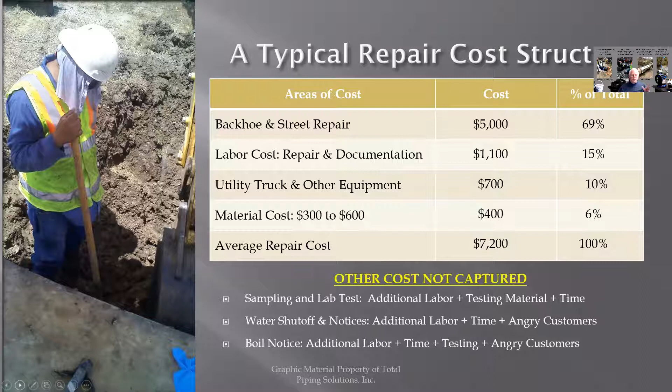There are other components of every job involved, and that could be sampling, downtime, angry customers, boil notices. You name it. There's a lot of things involved with making a repair, and we want to make it safe—safe for the worker doing the repair, and safe for the public at the same time.

So when we look at how to make line repairs, typically 2 to 12 inch, that's most of the pipe in the ground, there's 3 ways to make a repair. We can clamp around the pipe—that's probably the most prevalent type of repair used. We can do a cut-in repair where we cut it out, bring in 2 couplings or 2 MJ sleeves, and a piece of new pipe. That takes a little bit more time.

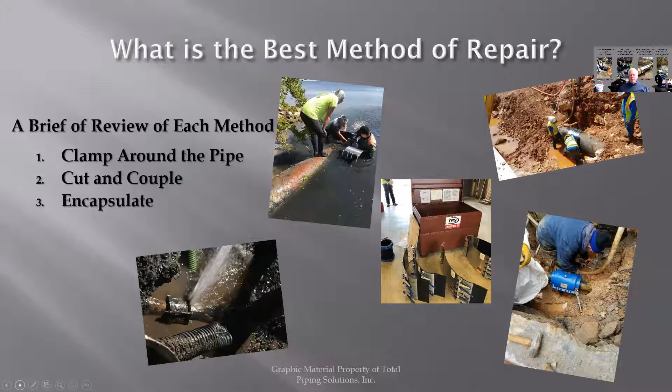And then we can encapsulate the leak. It could be a leaking joint, it could be a leaking coupling or old repair clamp. Any number of things can leak on the line.

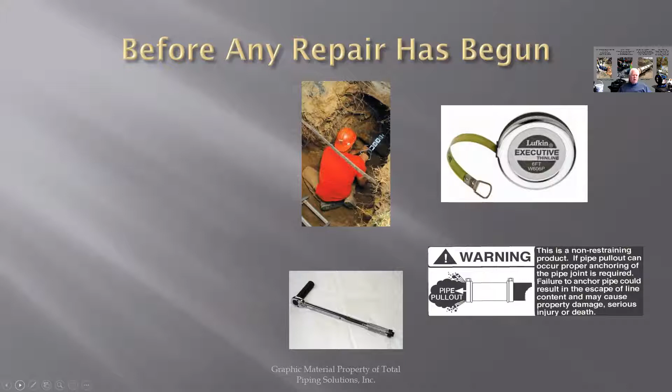So before we start any repairs, what we want to look at are some of the things essential to making a successful repair. We always clean the pipe, and every manufacturer says clean, descale, wash it down with some water. Make sure you have a good sealing surface for whatever you're putting on the pipe.

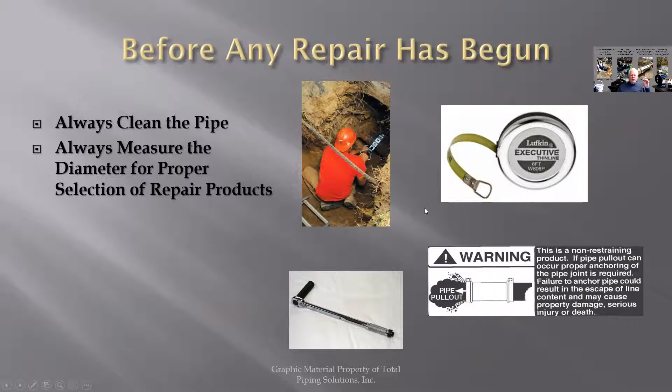Secondly, always measure the pipe diameter. I'm going to go back and forth between these slides and a little hands-on here. At this point we've got an OD tape here—we supply those if anybody needs them. It's essential to know how to use an OD tape, believe it or not.

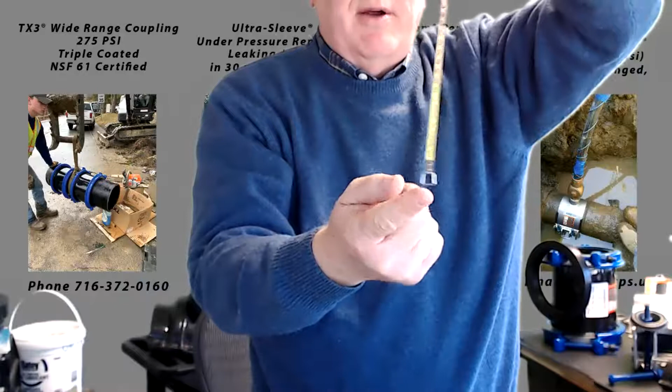When we're using an OD tape, I had a guy not too long ago—you see the little pull tab here? He pulled it around and read to the end of the pull tab. Well, that pull tab is about 1/4 of an inch long, and that ended up being a full inch difference in diameter on the pipe. He had the wrong repair product out on the job site because he didn't know how to use the OD tape. When you're using an OD tape, always measure to the beginning of the scale, not the pull tab.

That's some basic training stuff that people need to know and be aware of, and I think it's essential to what we do with our jobs on a daily basis. So know how to use your tools and your products that you're using to make the repair.

Always read product labeling—there's tons of good information on product labeling. Is it restrained? Is it non-restrained? Is it good for water, sewer, natural gas? What is the line content the product is compatible with? And last and foremost is the torque on the product.

Why do we want to talk about torque? Torque protects the pipe. Too much torque can crush the pipe. Over-torque can crush the product or deform it. A proper torque sets the gasket at the optimum setting for performance of the product at a working pressure that's satisfactory for the product itself.

So one of the things I look at is nuts, bolts, and washers. A perfect example—I won't say who in upstate New York did this—they called us and said the bolt's bent, the lug's bent on the repair clamp. What we found out was that they failed to read the directions on the product. They were using an impact driver that had 3 settings on it, A, B, and C. Setting A was 75 foot-pounds, setting B was 150, and setting C was 250 foot-pounds of torque.

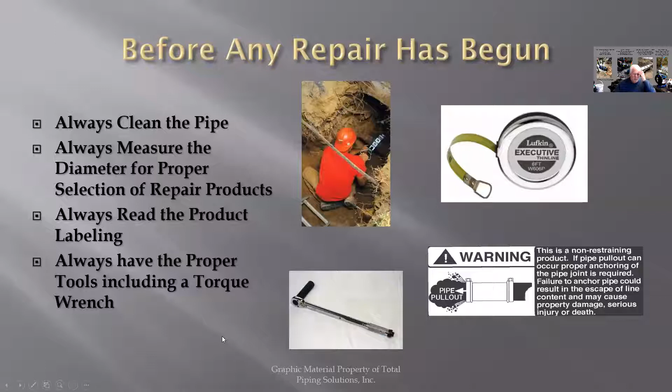So every material has got a yield point, and too much torque will actually interfere with the performance of the product. So when we look at that, let's make sure that we're using our tools properly.

So next thing we want to talk about is repairs with repair clamps, the proper way to do them. One of the things that we do is we're going to fix a lot of different kinds of things with a repair clamp. It's under a reduced pressure, always under reduced pressure.

Repair clamps are not designed or made to be installed under full working pressure. No product is. All seals work better under reduced pressure. And when I say pressure reduction on a repair clamp, what is that? Take it down to 10 or 15 pounds.

Can't find a valve that works, and I've been on several jobs like that where we have an old system. We've got valves that haven't been exercised or used in years, and you can't shut the water off. So what do you do? Open a couple hydrants, drop the pressure down, bleed everything down, get it to an acceptable point where the flow is dropped, the pressure is dropped, and then the seal will work in a pretty good fashion.

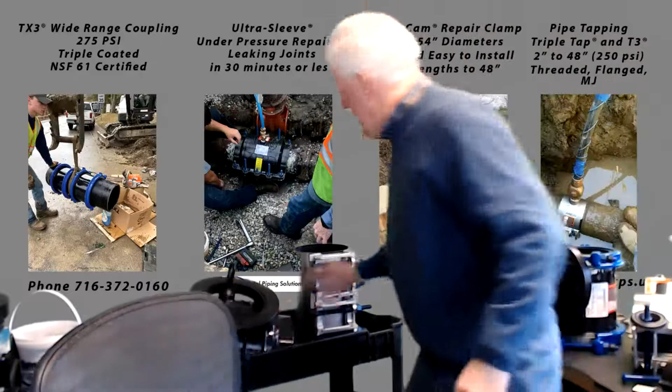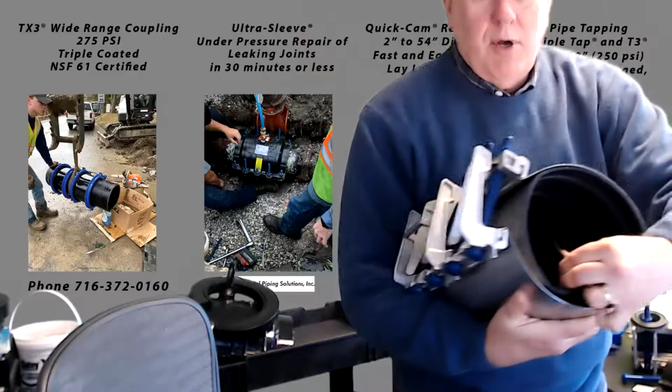So one of the reasons I'm talking about seal is if you look at a repair clamp, this is our Quick-Cam repair clamp, real easy to use, high performance product. Every gasket on every repair clamp, whether it's our repair clamp or otherwise, we've got to show this, has got a tapered end on it. And that end, that tapered end can actually bend over and pinch off.

And actually operating pressure will cause that to bend over and pinch off. So what happens if it bends over and pinches off? We have a problem. We have a leak path built into the gasket when that happens. So you want to make sure that everything stays in line, that won't happen. The pressure won't push that taper over for a bend. That's got to be laid over and rotated and smoothed out on the pipe.

So to get a successful seal on any kind of a repair clamp, whether it's a Quick-Cam made by Total Piping Solutions or whether it's brand X, Y, or Z, make sure you always reduce the pressure.

Other thing you want to do is lubricate the gasket on a repair clamp too. Lubrication allows all the little indentations and imperfections, the peening on the ductile pipe, everything to smoothly settle in and the gasket to seek the lowest point in a quick fashion. So lubrication is helpful in installing any clamp.

In lieu of lubrication on a repair clamp, you can always use soapy water. So I got a bucket of tub lube back here. We like that product, it's an OD lube. There's poly water, there's all different kinds of lubes. This lube that we use is a little thicker. It doesn't really wash out under pressure very easily, and it is water soluble and NSF 61 certified and approved. So good for use on any kind of pipe repair.

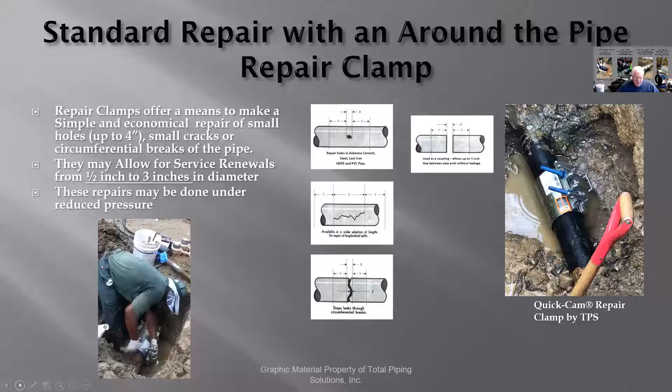Again, everything needs to be done under reduced pressure. When you think about making a repair on a leaking bell or some kind of leaking joint, would you ever use a repair clamp on that? No, never. Whether it's stainless, ductile lugs, or whatever, as soon as you step the gasket, you lose working pressure rating. As soon as you interrupt the gasket path or the way it lays on the pipe, you're going to lower the pressure rating. So it's not to be used for anything other than complete and total inline repairs.

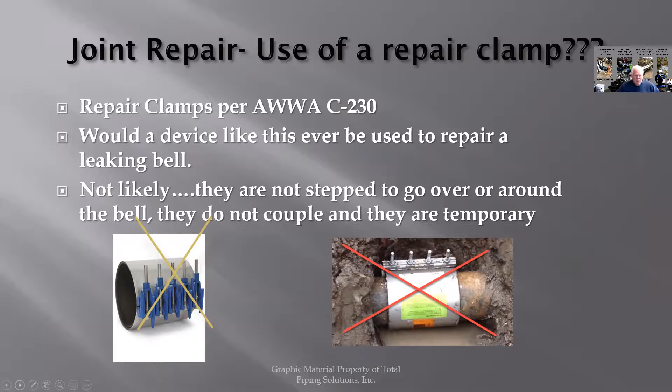When we look at the standard repair in the industry, other than repair clamps, I call this the go-to repair—the cut-in repair. Basically what we're all doing is leak detection. We find the leak point, then we have to determine how we're going to make that repair: repair clamp, cut-in repair, depending on the severity of the damage, or maybe encapsulation of that leak.

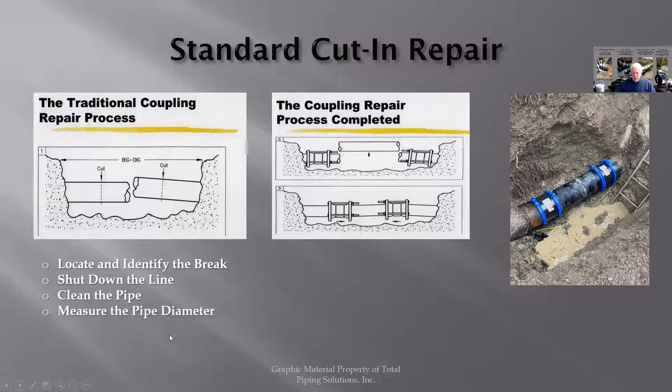So when we're looking at the traditional process of a cut-in repair: identify the leak point, shut the line down, cut it out, bring in 2 repair couplings or 2 MJ fittings and a new piece of pipe, and couple it all back together. Again, locate and identify the break, do a shutdown, pipe clean, measure the pipe after cleaning to get the proper OD, select the product, remove the damaged section, and then disinfect as part of the reassembly process and replace with new pipe and 2 couplings.

So it's a pretty big job—takes somewhere between 2.5 and 3 hours for a 6 to 8 inch repair. Again, everything needs to be tightened to the proper torque, and of course the bigger the diameter, the longer the time. So when you get up to a 12 or 16 inch, you might be into it for 3 or 4 hours on a repair like that. Those types of repairs are very common in the industry, but they do require a lot of time and labor.

We manufacture a coupling here—we'll just show it to you real quick. It's called the TX3. It's got 12 to 14 mils of epoxy, and it's a three-layer coating system. We've got a zinc prime coat underneath. We split the end ring—compression end, split end. That split allows us to easily assemble them here in Olean without a hydraulic press, pushing the gasket on. Nice handle, higher working pressure than anything else out there—it's rated at 275.

Gasketing is NBR and NSF 61 approved, for 61 and 372, which means don't worry about lead in the gasket compound. It's a nice layered gasket system with an inner layer and outer layer. The inner layer is good for IPS, ductile cast iron. The outer layer is good for AC pipe diameter. The inner layer, if you remove it, as you can see, just pops right back into the grooves.

You can put it back in. So we don't really need to worry too much about ruining the product because we pulled the gasket out at the wrong point. It's not a flip-out gasket, it's not a change-out gasket. Everything is integrated, it's all fully replaceable. So I think it makes it very convenient for use on cut-in type repairs.

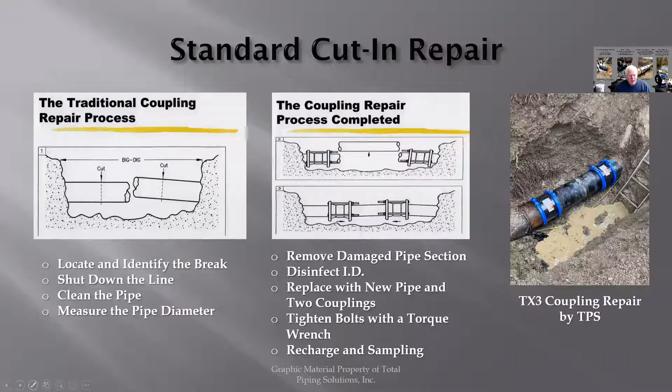So going back to those types of repairs, the next thing we want to look at is repairs on other things. And you probably think, well, we've already covered those things. Well, if we look at the number of repairs done on the most predominant pipe sizes, 4 through 12 inch, that represents 85% of the repairs in the marketplace.

What you don't realize, and again this is a number we've pulled out of AWWA working with different utilities around the country, 20 to 25% of leakage occurs on existing joints: old couplings, joints, push-on joints, rolled gaskets, AC pipe collars, universal cast iron pipe joints that are leaking. There's a lot of things that leak underground that just don't involve pipe breakage, rust, or corrosion.

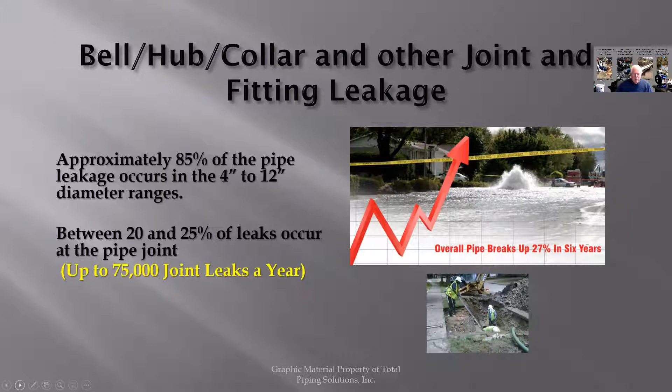That's a lot - that's 75,000 leaks a year on existing joints. So I think what we've got is something worthy of consideration for repair of these types of joints that you see in this slide.

AC pipe collars leak on a regular basis. You've got a ring joint in there with a gasket. As they age, they wear, or if you get any movement or deflection, if the pipe doesn't break, it's going to roll the gasket and you're going to get a leak.

Universal cast iron pipe - you see a lot of this on the east side of the state. Yonkers is one area that I know has a lot of universal cast iron pipe. That's machined end to machined end. It's 2-eared pipe with through bolts pushing the ends together. Kind of interesting - it was gasketless pipe, and they relied on the 2 machined ends mating with enough pull there to prevent leakage.

If you look at the old standards for universal cast and for AC pipe, after installation there was an acceptable amount of leakage, and that's actually in the standards. That leakage was expected to dissipate as the line calcified over a period of time, and that typically happened pretty fast.

So the next kind of joint we see a lot of leakage on is leakage on joints like bells and spigots, universal cast iron. These are your traditional shut-it-down, cut-it-out type of repairs. That's your go-to repair, with 2 couplings and a piece of repair pipe.

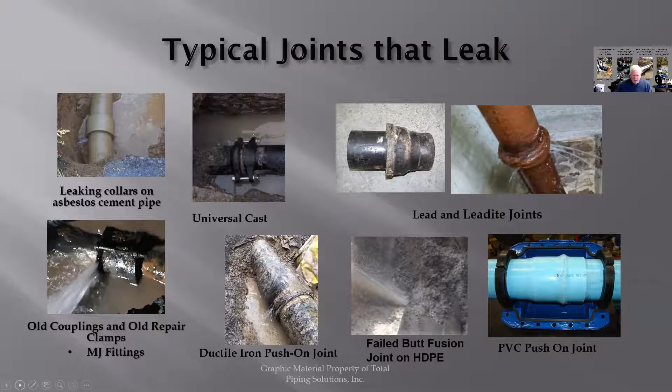Fusion joints, that's another thing. We're seeing more and more leakage on fusion joints. If you look at any kind of pipe generationally, every generation of products is the perfect pipe at the time. Even HDPE, the current generation of pipe, is not the perfect pipe. We see all kinds of damage and leakage on HDPE on a regular basis too. So it doesn't corrode, but there are other issues with HDPE, and a lot of that is on fusion joints, whether it's a butt fusion or a fusion fitting of some kind. They do have issues.

So one of the ways we look at repairing a bell and spigot joint or any kind of joint leak like that is with a bell joint harness. One of the problems with a bell joint harness is there are a lot of components, it's labor intensive, takes time to put on, and they're not permanent.

And one of the things most installers don't realize is if you look at the fine print, the directions in the box, all the manufacturers universally say the same thing: remove the lead, remove the leadite, remove the rope caulk, replace the rope caulk, and then use this to retain it in place. That's really what this is for. It's a gasket retention device with a gasket that's used to retain the packing in the joint.

So is it permanent? No, it's not permanent. It's temporary, might last a couple of years. You might even have seen them last longer. The reason it lacks permanence is when we look at the gasket in this area that we're pushing in, the gasket is not retained by anything, and it can flow away from the push point or the point of pressure on it. And it will eventually drop down in working pressure rating as it ages.

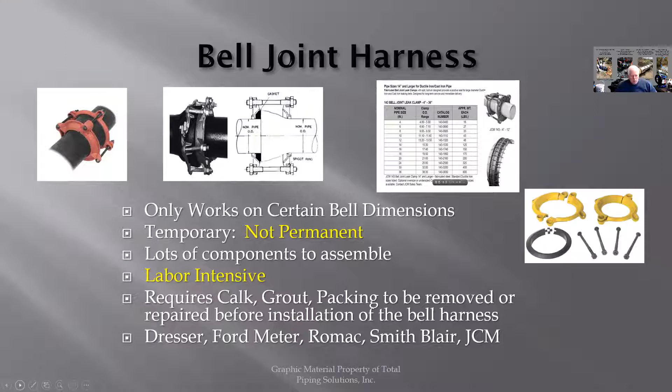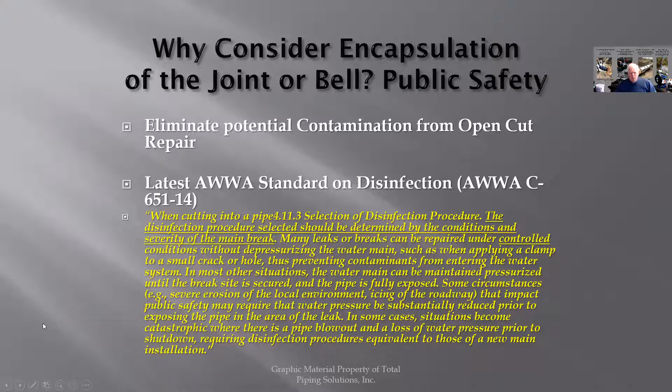So not permanent. So when we talk about encapsulation, and I've alluded to that a couple of times, why are we interested in joint encapsulation rather than cut-in or other types of leak repairs? In 2014, AWWA issued the C651 2014 standard. It raised the bar in the industry as far as requirements for disinfection. And rather than read that standard, it's easily broken down into 3 different categories.

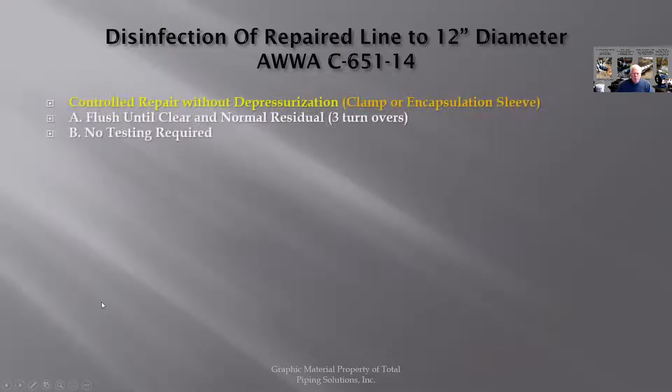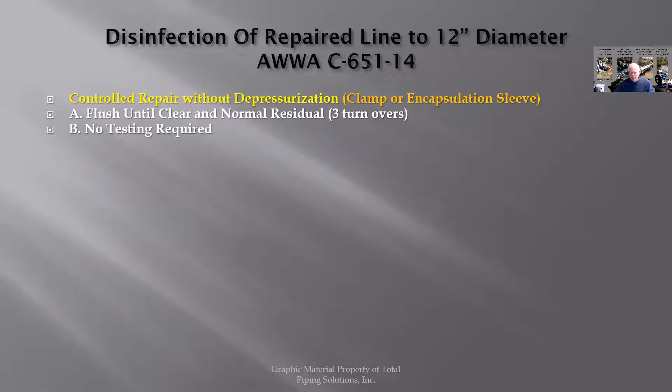Number 1 is a controlled repair without depressurization, and that's the use of a clamp or an encapsulation sleeve. We can do that under reduced pressure. We're just going to repair the leak by covering the leak point under reduced pressure, whether we use an encapsulation sleeve or a clamp, and we're going to flush and get a normal residual. We really don't need to test there. That's a quick, easy repair.

The second kind of repair, and this is where the standard starts kicking in: semi-controlled open cut repair. What does that mean? We've got an excavation, we're going to do a cut-in repair. It's above the water table, so we don't need to worry about groundwater contaminating the ID of the line. So it's kind of controlled. We're going to use a couple of couplings, a couple of MJ fittings, and that piece of repair pipe section. Then we're still going to have to disinfect the line with a 1% chlorine solution, and then flush to clear and do a quick biological sample. So that's a common repair.

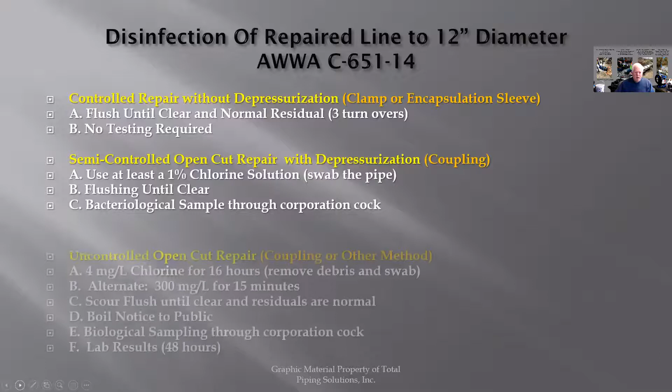Here's the repair we're most concerned about, and that's the uncontrolled open cut repair. That was the repair I talked about earlier, where we had the excavation, the pump broke down, the water table came in, and the internal components of the line got contaminated by groundwater because the cut had started, the pump broke, the line was open, we contaminated the line. So what do you do in that case?

You're going to make your repair, you're going to disinfect, but you're going to treat it like a new line. It's got to be a hot chlorination, done over a 16-hour period of time, like commissioning a brand new line, or we're going to do a super chlorination and flush over a 15-minute period of time. And even if you do all that, you still need to put out a boil notice. You need to have a biological sample, and work with, like I know our friends over at New York State Rural Water, I've had some discussions with them.

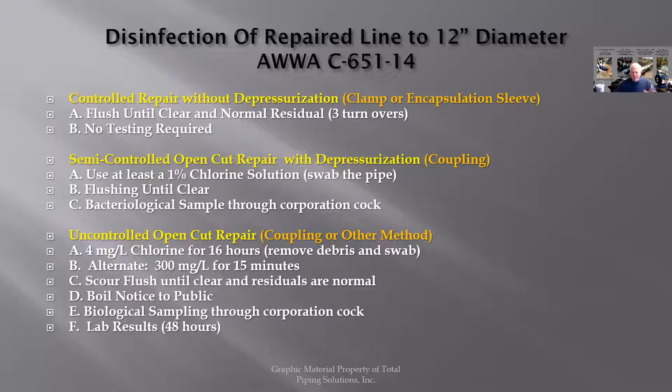Most labs come back in 24 to 48 hours. The target time is 24 hours, but just because of the backup in a lot of labs, typically it's a day and a half to 2 days to get results back. So while you've got all that going on, what do you have?

You've got mad customers, you've got shutdown, you've got people that can't use the water. So if we look at the two types of repairs, your cut-in repair and encapsulation repair, let's evaluate both. Cut-in repair: 2.5 to 3 hours. Encapsulation repair: 20 to 30 minutes.

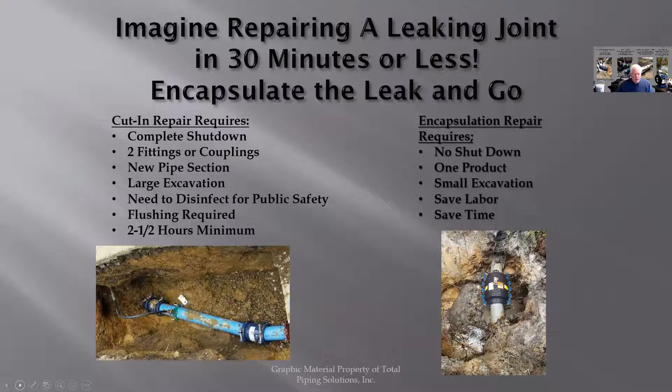So you're going to eliminate the shutdown, you're going to eliminate the need to disinfect. You'll have to lower the pressure a little bit to make the repair, but it's an under-pressure repair, and it really speeds up the process, cuts a lot of time and labor. They're competitive, no more than the cost of really 2 couplings and a piece of repair pipe. We've eliminated the end gland that needs to be tightened down.

Years ago I worked at a company called Dresser. Everybody knows the old Dresser coupling. We made a product called a Dresser bell pack, and this is what the bell pack used to look like. This is our design today — we call it the Ultra Sleeve.

The bell pack had perimeter bolts all the way around, and like a lot of MJ sleeves you guys are familiar with today, we have an end gland that we have to tighten down in order to squeeze the gasket on the pipe. We've figured out a way to do that without having to have that end gland in there. So by eliminating a whole bunch of bolts — in the case of a 6-inch, probably about 16 bolts on the end — we've enabled you to speed up the installation process on that without the gland.

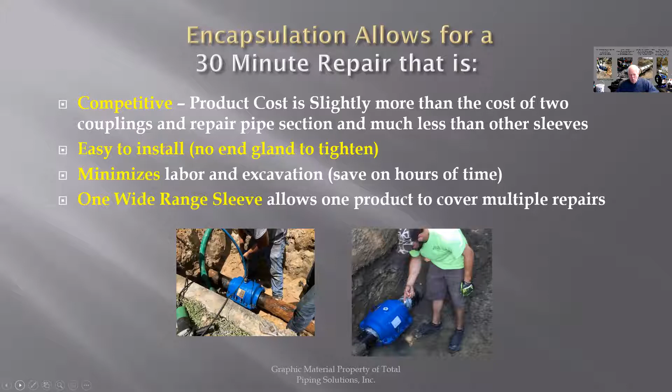So we cut labor, we cut excavation time, and we've made these things wide range so that 1 6-inch covers everything, 1 4-inch, 1 8-inch, and then when you get into the 10s, 12s, 16s, and 20s, it's a little different up there because there's a lot more range to compensate for in the pipe. But we believe we've developed a cost-effective solution that can allow you to repair a fusion joint.

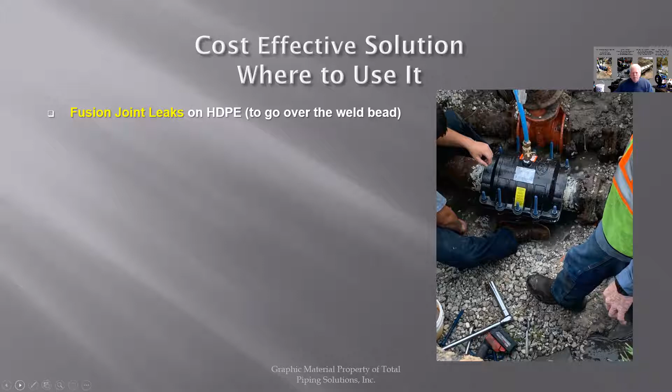Good example on fusion joints: a job in Connecticut not too long ago, there was a couple miles of HDPE pipe, all fused, 40-foot long sticks. When they went to commission the line, they had about 20 fusion joints leak — all butt fusions. The contractor was in a hurry or didn't know what he was doing. Water got into the fusion, little drops of water, you got bad fusion. There was dirt in some of the joints. So when they went to pressure test it for the commissioning, all these joints started failing.

So what did they do? They had to really consider how to make a repair on those joints. The utility said shut it down, cut it out, and just replace the line, do it over again. The contractor, of course, didn't want to do that. They said, well, we've got some options. When we're doing a fusion joint repair, what can you do?

Well, one of the things that happens on a fusion joint, interestingly, is that when you're doing a fusion, you're going to heat 2 ends together, jam them together under pressure, and it's really plastic welding. So the 2 molten ends meet, they cool, but when that happens, you push up what we call a weld bead, just like welding metal, and that's a 1/4 inch bead that goes all the way around the pipe.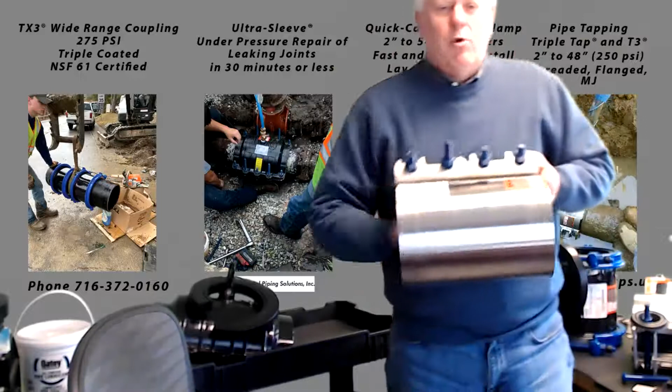The problem with repairing it: you can't really use a repair clamp, because a repair clamp is an inline device. As soon as we put an interruption in the pipe, the repair clamp isn't going to work properly — you're going to get a reduced working pressure rating. So some of the folks at PPI said, hey, just shave off that weld bead and then use a repair clamp over that. Well, two things: we still got the contamination in the joint, and the repair clamp is going to squeeze that product down, and it's going to neck out, and eventually leak in the future, and the joint's derated. So when you look at it like that, probably not the best way to do it.

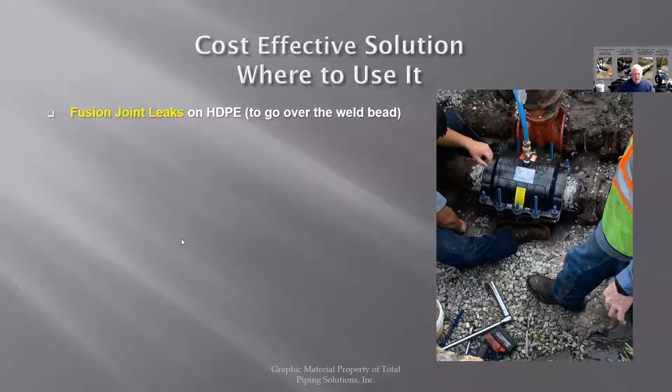You can encapsulate that, and with encapsulation it's kind of a neat, easy way to do it. The encapsulation of that joint responds to really the working pressure of the line and works back and forth with the pipe itself. Cost-effective solution, any kind of joint — ductile, cast iron, PVC, AC — large splits or breaks.

You can use these like repair clamps. You can use them like couplings. You can use them to go over old couplings, old repair clamps.

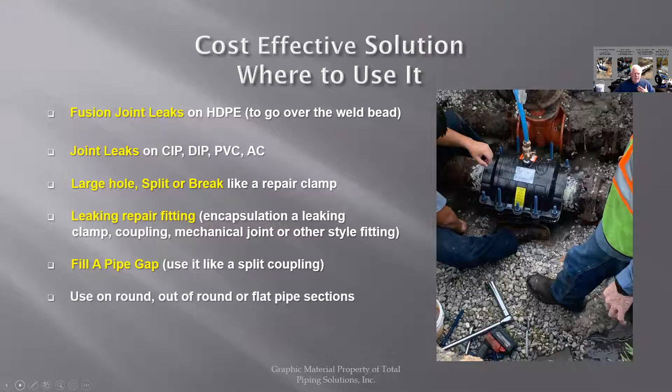They can be used to fill pipe gaps, which you can't do with a lot of products. They'll work on out-of-round sections on the pipe, and they work on all your AC pipe fittings.

So let's go back and look at what we've done in terms of ability to save some money for the utility, cut time, cut cost. Where'd these numbers come from? I've had a couple utilities recently say, hey, let's look at the cost of this versus the cost of our traditional cut and repair. A lot of the numbers here we established through working with a couple utilities in Texas, and these numbers came from Sacramento out in California. Dave Du Bois out there, head of the water department, was really interested in looking at this product. He saw it at the state AWWA trade show about 3 years ago, bought some, brought them back to the shop, and said, let's evaluate this product.

So what they came up with were some savings. They reduced the amount of excavation they had to make because they detected the leak. They went down and saw it was leaking on a joint instead of a section of pipe that needed to be replaced. So instead of increasing the size of the excavation to do a cut-in repair, he kept the excavation smaller. There was a savings there, which allowed them to cut their labor costs. The intangibles went down too — they didn't have to dewater as long, and they didn't have to worry about some of those other types of things.

What they did was — and I alluded earlier that it's almost a wash on the price of products — they actually elected to restrain across this fitting too. So when they encapsulated, they restrained both ends. That's a requirement in Sacramento on a lot of repairs: no matter what we put in, we restrain across it. That's not always necessarily needed, but in their case they had unstable slopes, so they went ahead and did it. If you've got movement in your soil or anything like that, you might want to make consideration for that.

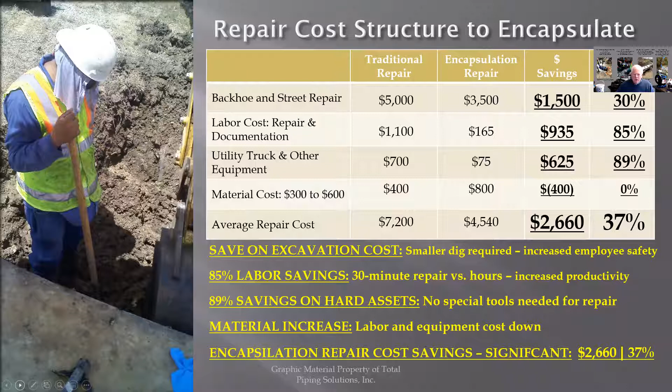But anyways, what they established was that they saved somewhere between 35 and 40% on the cost of the repair through the use of an encapsulation joint. So a really neat way to make some savings and send them back to the ratepayer and to the utility.

So when we look at the general product specifications for this product, today we're making them or casting them out of ductile iron up to 12-inch. 16s and 24s will either be fabricated or cast out of ductile iron. The 24s are fabricated, and the 16s today are fabricated, but we're actually producing patterns to cast those, which keeps it very competitive if we can cast them out of ductile iron.

Gasketing is NBR. When we look at the gasketing material, NBR is a great material for gasketing because it resists hydrocarbons. It can be used on water and sewer in the presence of hydrocarbons — you might have a lens of hydrocarbon in the ground that would degrade any other kind of gasket. EPDM should never be used on sewer lines because it degrades in the presence of hydrocarbons, and 99% of all sewer lines in North America have some kind of hydrocarbon in them. So if there's hydrocarbon in the soil from an old leaking gas station, that's going to attack the gasket from the outside. That NBR gasket, which is what we're using on all of our gasket material here today, is resistant to hydrocarbons, all your water chemistry, and it's resistant to natural gas, and it meets all of your NSF requirements, 61 or 372, for no lead.

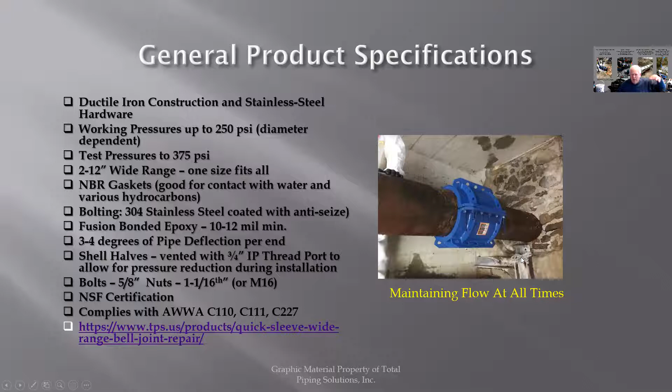We use stainless hardware throughout, and all the hardware is coated with the Xylan I showed earlier, which works very well to prevent galling as you're tightening things down. So what do these sleeves allow you to do? 3 or 4 degrees of deflection. Use them like a coupling, only you don't need a coupling — it splits across it and allows for that to happen across the split. up to 250 pounds working pressure, epoxy coated.

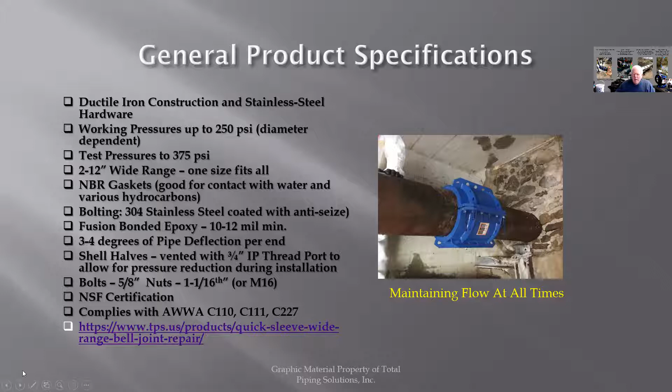It's a premium product that's going to save your utility a lot of time, effort, and money in the field.

One of the first things that happened when we developed this product, we came out with a quick sleeve. It was for ductile iron, cast iron. And as soon as we got that in the market, everybody started asking, can you do this for AC pipe? Can we do this for some bigger diameter, unconventional type pipe?

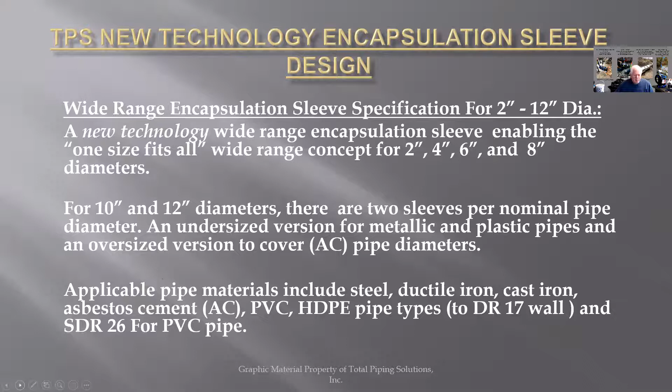So we redeveloped the product, and in the process we do a lot of 3D modeling. What we had to do was open up the pipeway to accommodate larger diameter pipe. The pipeway is the way the pipe goes through the fitting. So if we match these halves together, that diameter that the pipe comes through is the pipeway.

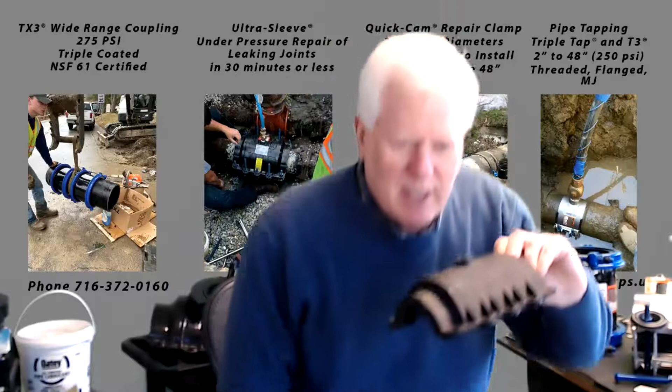When we opened that up, the casting got bigger, and this is the best way to describe it: that's the belly of the casting, and the belly got bigger too. In the process of making the belly bigger, it allowed us to do a lot more with this fitting than you could do before.

So you might note on the fittings, there's a port on top and the bottom. The port is for pressure reduction and bleed down of line content as you're installing it under reduced pressure. They're either 3/4 inch or 1 inch, up to 12 inch, and then on the bigger diameter stuff, they're 2-inch diameter ports.

It's a plug port. Everything is equipped with nuts, bolts, and washers, and the stainless steel plugs are already pre-equipped with the product itself in the bolt pack that we supply.

You plug the bottom, leave the top open for the pressure reduction and blow down. You want to allow the cavity or the belly to fill up and the air to bleed out at the same time.

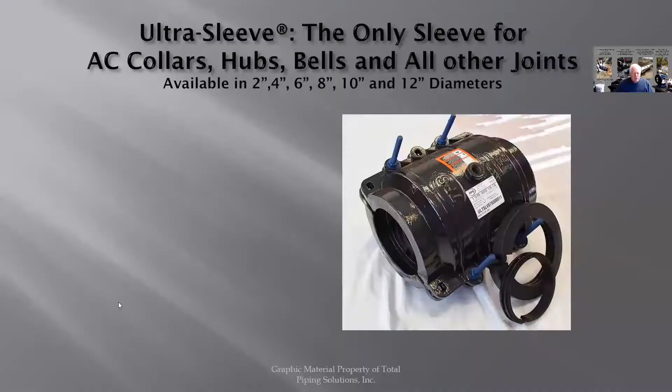We did that, and it came out really neat in terms of the way it works and the other things that it does. It will encapsulate AC pipe collars. That was the initial intent.

There's a lot more room for universal cast iron pipe. It'll go around all your bells and hubs, old couplings, clamps, flanges, up to the 8-inch size. A full AWWA Class D ANSI class flange can be accommodated by that.

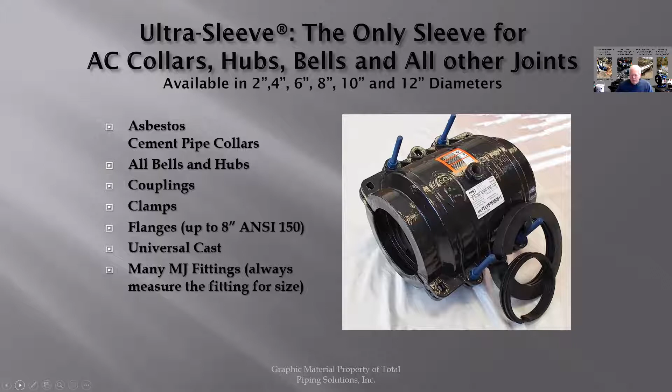It'll cover a lot of MJ pipe fittings. We can give you the internal dimensions. If you calculate the dimension of the fitting you're trying to encapsulate, it'll go over a lot of the stuff that you're looking at with potential for encapsulation.

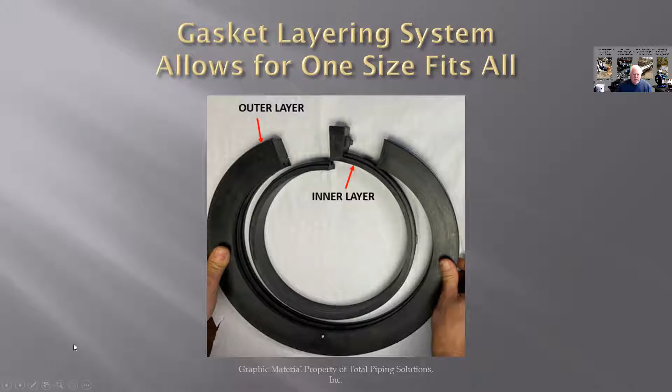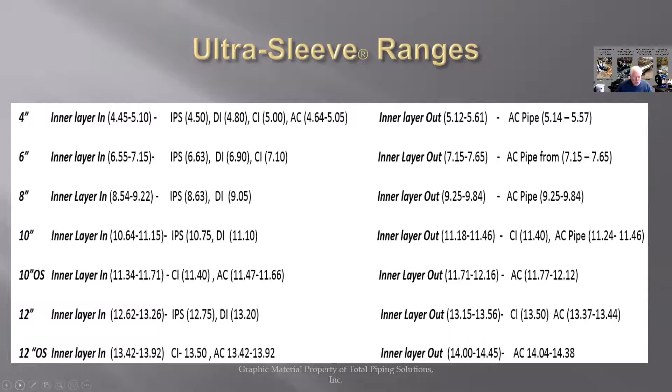So how do we achieve this? We do that by a layering system in the gasket, and the layering allows us to, as you can see here from this chart -- we won't spend a lot of time on it -- the gist is the lower range gasket, just like on the coupling with the layered gasket, is IPS, ductile, and cast iron. The upper layers are either AC or cast iron and AC. So a real simple range system.

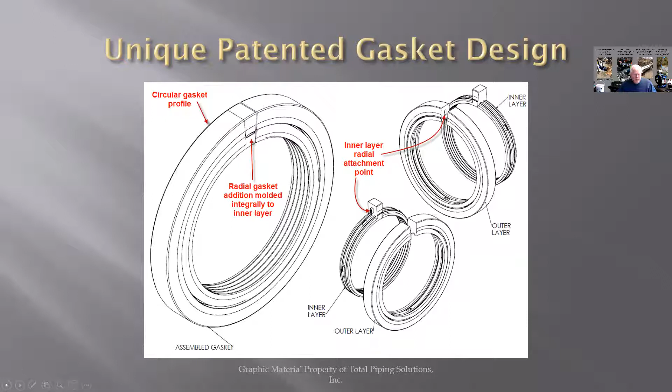The way the layers are set up on these things is there are 2 layers: an inner layer and an outer layer on the gasket. Everything is held in place like with a little spoke on a wheel, and that's part of our assembly process. The inner layer is assembled to the outer layer.

We use a pressure set adhesive on that. The pressure set adhesive is like super glue for rubber, a Henkel or Loctite product. Put 2 drops of super glue on it and they don't stick. As soon as you press, it sticks. That's the way this adhesive works.

So we apply the adhesive on the spokes, on the tailing ends of the gasket, and then everything is pressed in place until the gasket and the adhesive set.

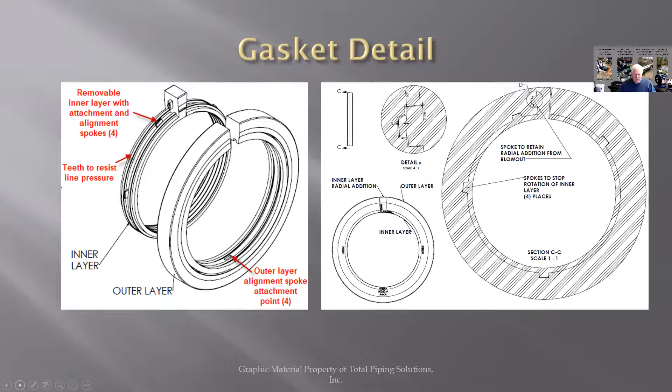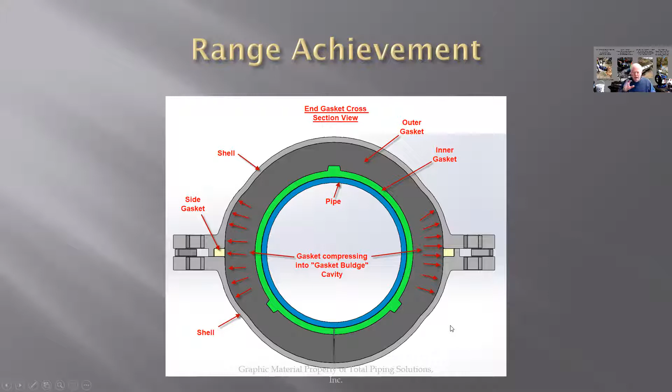In order to achieve movement, in order for the gasket to set properly, we've allowed for not just the circular space, but we've bumped out and allowed for a little more volume movement on the gasket itself and the casting itself. So this is always a really neat system.

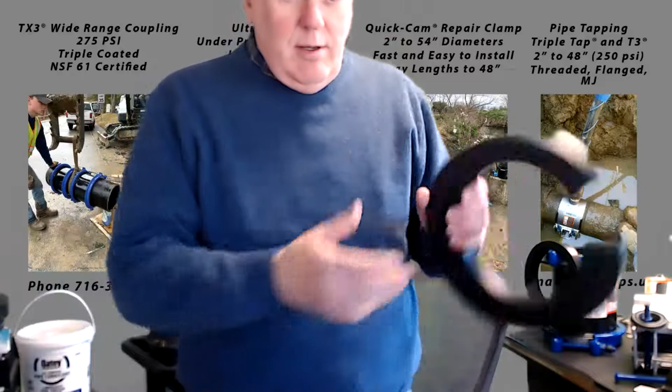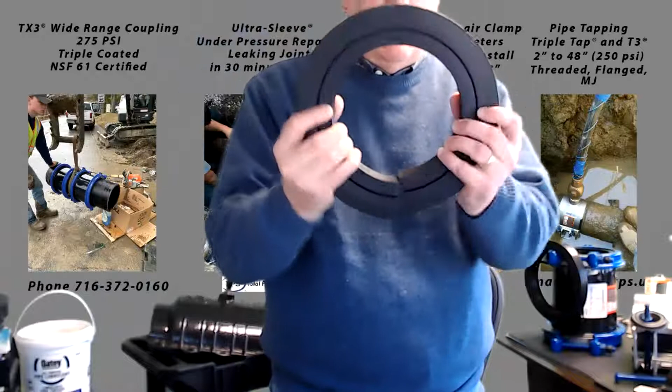We 3D model everything. Let's go back here to the gasket itself, and what you can see here is the blue dot goes to the outside, the groove goes to the inside when we're installing this. The gasket always goes on like this. It's a butt seal; the butt actually butts up on the bottom like that.

The butt on that seal is always opposite, or at 180 degrees, from the split in the case. We don't want to line all these splits up, so we want all of our splits at opposite positions. The gasket itself, if you can see the branding on here, the inner layer on here is 655 to 715.

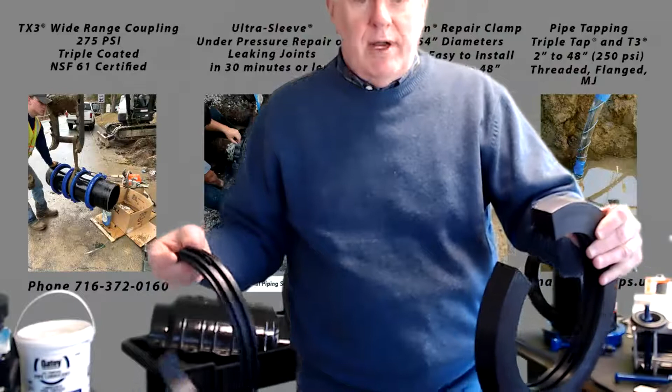The outer layer is 715 to 765, and 655 to 715. So what that allows you to do is use the inner layer for ductile IPS ductile cast, and the outer layer for your other pipe diameters that are bigger than that. It's a layer that's reinsertable and could be re-glued.

We would rather send you a replacement gasket or have your local distributor retain one on the shelf for you in place. It's easier to do that than to try to re-glue and reposition gasketing. So again, gaskets are NBR. High performance gaskets are actually rated up to 250. We test everything at 375 to 400 psi.

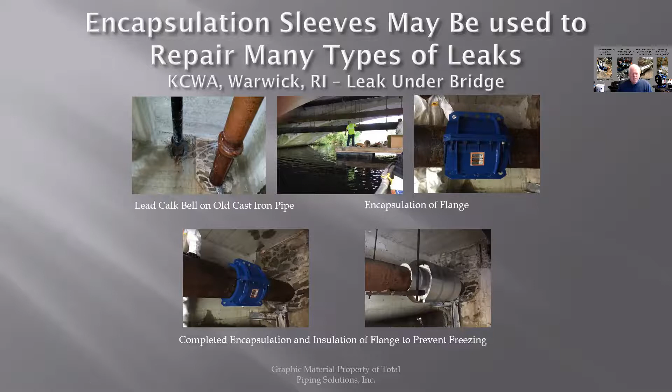If you want to see some applications we've used these on, we had a 6-inch main outside of Providence going into a suburb called Warwick, Rhode Island. On the other side of the river on that 6-inch main, we had a leak under the bridge on the bell joint. There was a health center nearby, so they couldn't shut it down. They elected to barge in the repair components. We fabricated a special sleeve for that application, and they installed it in about 45 minutes off the barge, insulated it to prevent freezing, and kept everything online and in service with no issues. A neat way to do it.

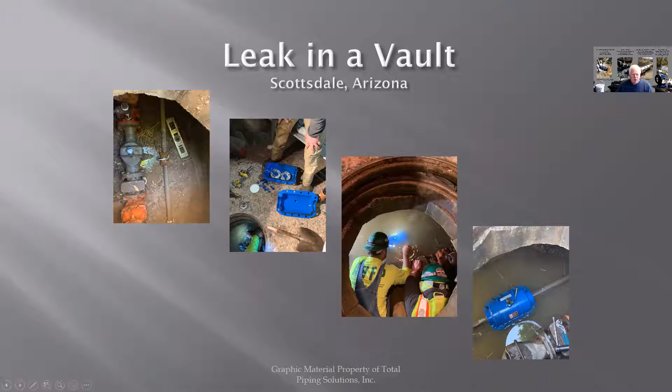We had a vault out in Scottsdale, Arizona, a 2-inch meter vault. We took the 2-inch sleeve down there, installed it on the leaking fittings on one side of the meter, and fixed the problem in about 20 minutes.

So these things work on ductile, cast iron, PVC, any kind of push-on joint where you could roll the gasket over the bell. This includes old AC pipe fittings, and you can see the old ring joints on each end of those. There's a lot of that out there.

Believe it or not, there's still 660,000 miles of AC pipe in the ground. The only utility I'm aware of that's proactive about removal and replacement of AC lines is East Bay Mud in San Francisco. They're doing 19 miles a year, which sounds like a pretty aggressive program. But at that rate of replacement, it's going to take them 50 years to replace their existing line.

So the numbers are huge. There's always going to be AC pipe couplings to repair if you've got it in your system, unless you get outright replacement.

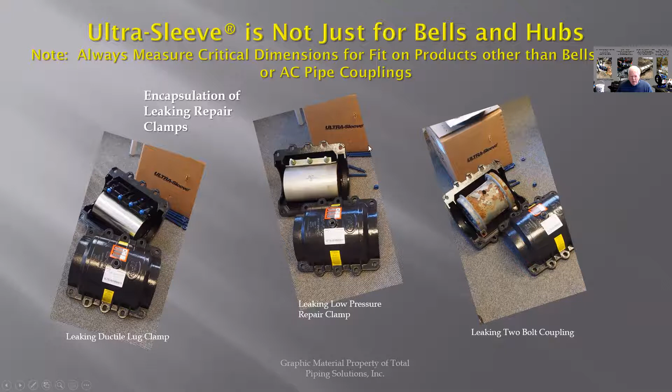With the bigger belly on the product, it allowed us to encapsulate a lot of things: ductile iron repair clamps, stainless clamps with ductile iron lugs, fabricated repair clamps, old Hymax couplings that might have failed because of leakage and corrosion problems. Here's a 2-bolt coupling being encapsulated down in West Virginia. Very fast, easy way to do it. It went right over the product.

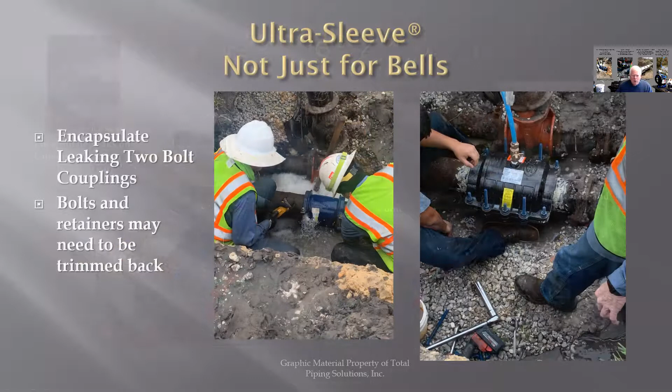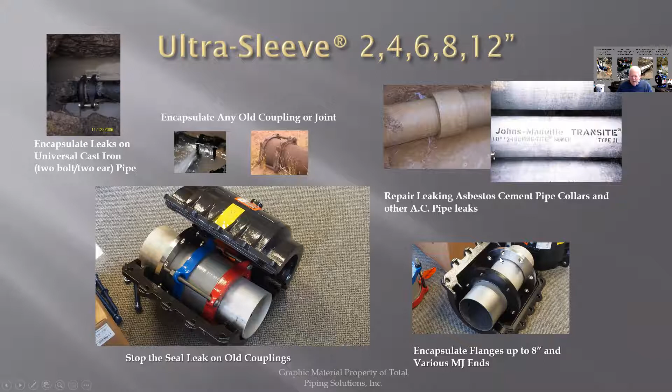The belly is big enough for your AC pipe collars, universal cast iron pipe, lots of room to move, old dressers of any kind. Here's a dresser, the 253, the old Spectrum - the 441 Smith Blair goes right over that. And if you've got flanges up to 8-inch, the 8-inch will accommodate those as well.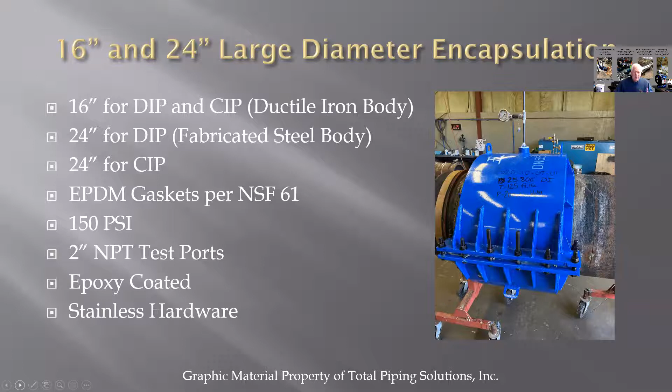We started moving a lot of the 2 through 12s into the marketplace several years back, and next thing we know, we've got a lot of requests for 16s, 24s, 18s, 30s. What we're doing today is stocking 16s and 24s on the floor for emergency repairs. They're a little different - the gasketing is different, and the test port is 2-inch instead of 1-inch or 3/4 inch. They're dedicated to the pipe size because you really can't build the range into it.

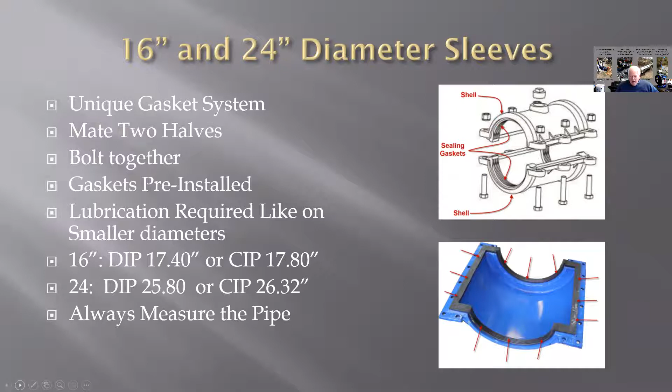So we've come up with a different gasket system, and really there's no range adjustment in it. You bring the two halves together and bolt them down. We've eliminated the end gland there - a real fast, easy repair system for your bigger diameter stuff. For sizes we don't stock, like 18, 20 - I've got a 30 going through the shop right now - the fabrication time is about a month. Those would be better for planned repairs, but keep in mind 16s and 24s for ductile or cast iron are on the floor here ready to go.

So when you've got these types of sleeves, we've got to make considerations for how to do the installation - like with everything else, measure the pipe once you clean it off.

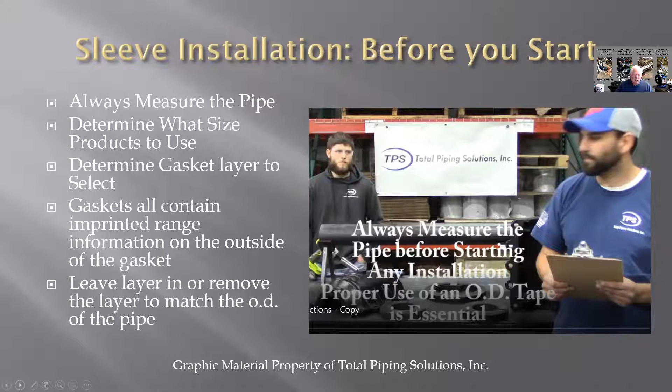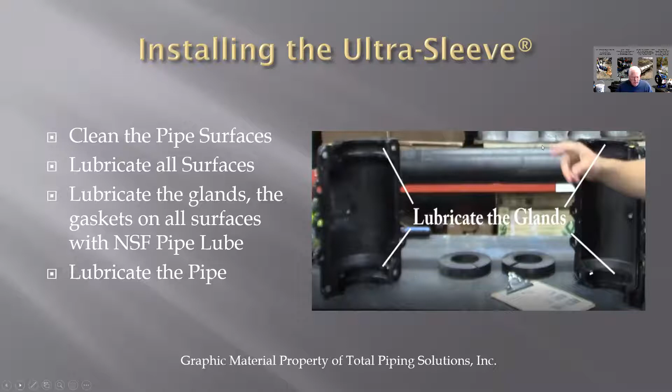We determine the gasket, the size of the fitting we're going to use, and then lubrication comes into play. It's really important—if you can see, there's an end gland here. We want to make sure we lubricate the end gland, and if you look here, you can see one in the back.

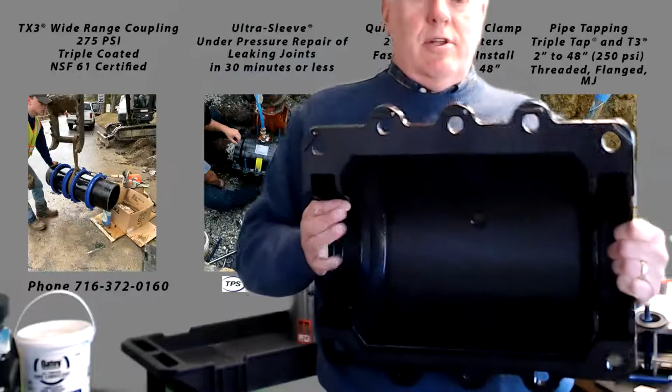I'll bring this forward a little, because it's ductile iron, you can see the glands—we want to lubricate the glands. Everything comes with a lifting eye as part of the product as it's shipped to you in the box. But why do we lubricate the glands? We lubricate the gaskets, the side rails, and the pipe.

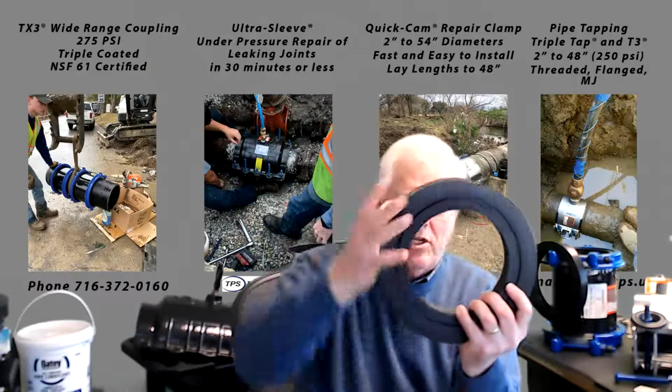Why do we lube? Because when we're pulling everything down together, everything slides together. We want the split, or the casting butt, to come together. The casting will actually push down and draw everything together as we tighten everything up.

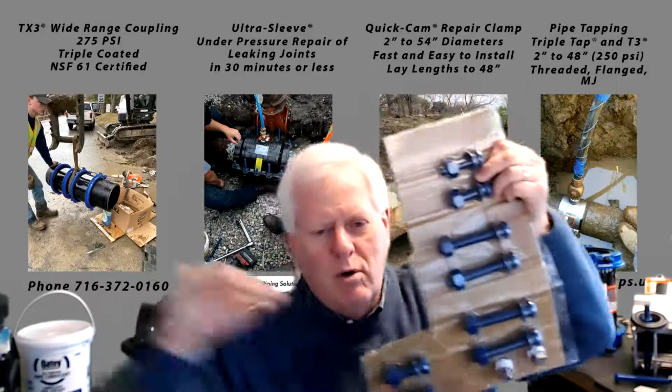When we do the tightening process, there are long bolts that go out the outside four corners—those are your starter bolts. They give you a bigger gap to cinch down with. Once you're at torque on those, you tighten the other, shorter bolts during installation. So we've thought of a lot of things to really speed it up.

Lubrication is essential. As I pointed out, we've got Oatey lube, or you can use Polywater—there are tons of lubes out there. For rough wall pipe, always use pipe lube, NSF certified pipe lube, on the glands, the gasket, the sidebars, and the pipe.

On smooth wall pipe like PVC, HDPE, or even copper pipe, you're going to want to use just soapy water on the pipe itself, but still use pipe lube on the glands. If you use pipe lube on smooth wall pipe, that allows for almost a permanent lubricity, giving the potential for the product to move and slide on the pipe. You really want to eliminate that, so the best way is to only lubricate with soapy water.

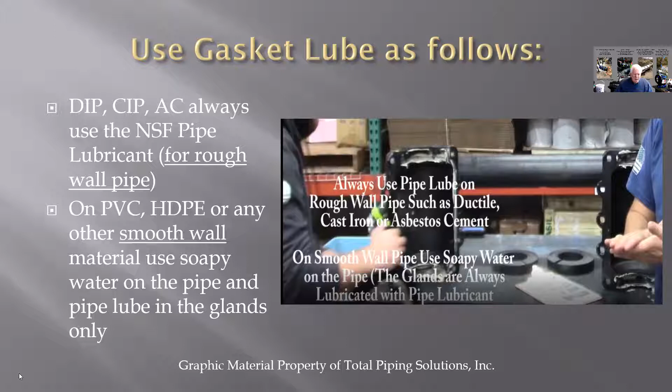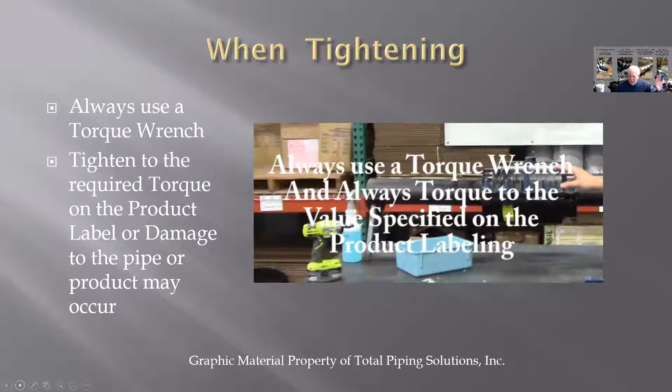Lubricate with the proper lube per the directions—that's why we want to read the directions. What do we torque these down to? Most of the product labeling says 100 foot-pounds. That brings it right down, gives you a leak-tight seal between 200 and 250, and it'll test to 375 to 400. Everything's on the product labeling.

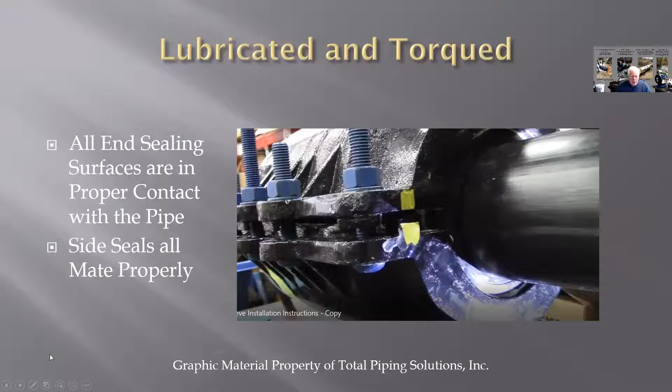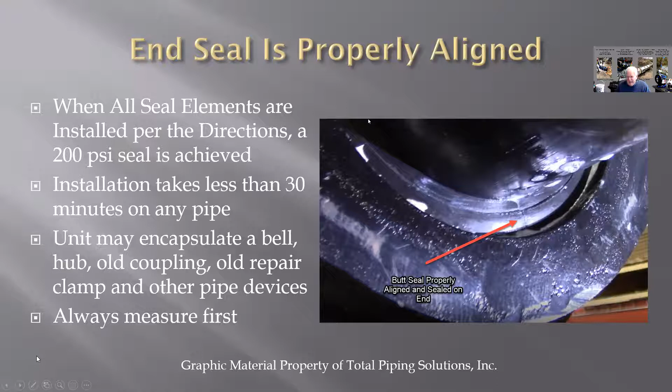This is what the side seals look like when tightened down at 100 foot-pounds—you're almost metal bound, metal to metal. This depicts what the gasket looks like, at right angles to the split in the case. On any of these sizes, you've got a repair that can be done in 30 minutes or less with an encapsulation like that.

A lot of the courses I give in California in particular, they say, send your survey out, and we've got to have a way to verify these guys were online listening to the end. So at the end we use a code phrase—it's called Ultra Sleeve. As soon as I get the survey back, I look for Ultra Sleeve on it, so I know they stayed to the end because I heard the code word. We're not using that today because AWWA, New York State AWWA, is taking care of that.

We do stuff up to some pretty big diameters—repair clamps 48 inches long, 54 inches in diameter. We make corporation abandonment fittings, and a lot of different specialty fabrications that we're producing here in Olean, New York. So on that note, think Ultra Sleeve as an alternate way for making your repair—it could save you time and a lot of money.